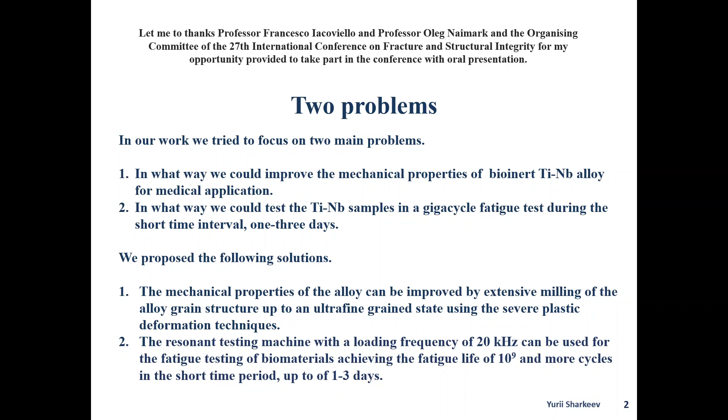The mechanical properties of the alloy can be improved by extensive milling of the alloy grain structure up to an ultrafine grain state using the severe plastic deformation techniques. The resonant testing machine with loading frequency of 20 kHz can be used for the fatigue testing of biomaterials, achieving the fatigue life of 10 power 9 and more cycles in a short time period, up to 1 to 3 days.

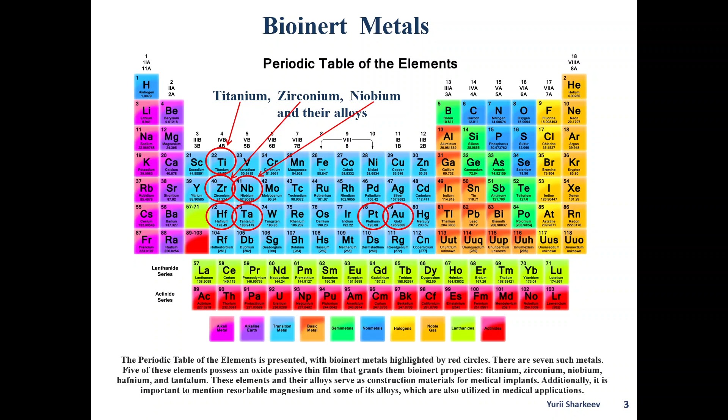The periodic table of elements is presented here, with bioinert metals highlighted by red circles. There are 7 such metals. 5 of these elements possess an oxide passive thin film that grant them bioinert properties: titanium, zirconium, niobium, hafnium, and tantalum. These elements and their alloys serve as construction materials for medical implants. Additionally, it is important to mention resorbable magnesium and some of its alloys, which are also utilized in medical applications.

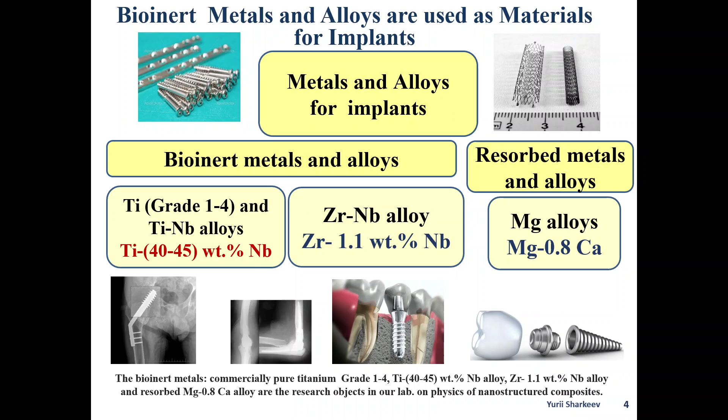The bioinert metals, commercially pure titanium, titanium niobium alloy, and zirconium niobium alloy, as well as resorbable magnesium calcium alloy, are the research objects in our laboratory of physics of nanostructured biocomposites.

The titanium niobium alloy is an exceptional bioinert material for medical implants due to its biocompatibility, high corrosion resistance, and low elastic modulus, which is comparable to that of bone tissue. However, this alloy possesses one drawback: insufficient mechanical strength. The titanium niobium alloy exhibits an elastic modulus within the range of 50 to 60 gigapascals. Alloys of this composition are utilized in medical application as materials for medical implants.

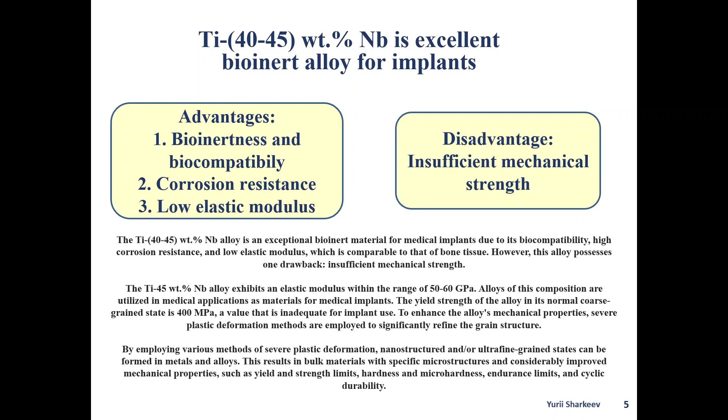The yield strength of the alloy in its normal coarse grained state is 400 megapascal, a value that is inadequate for implant use. To enhance the alloy's mechanical properties, severe plastic deformation methods are employed to significantly refine the grain structure. By employing the methods of severe plastic deformation, nanostructured and/or ultrafine grain state can be formed in metals and alloys. This results in bulk materials with specific microstructures and considerably improved mechanical properties such as yield and strength limits, hardness and microhardness, endurance limits, and cyclic durability.

We employ a combined method of severe plastic deformation consisting of ABC pressing followed by multi-pass rolling to create an ultrafine grain state in titanium niobium alloy billets. ABC pressing involves one or three pressing steps at a constant temperature. As the process transitions from one pressing step to another, the sample temperature is gradually decreased by 50 centigrades within the 500 to 400 centigrades range.

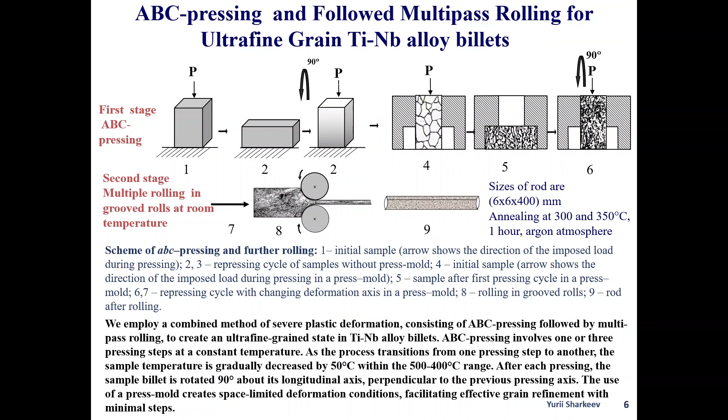After each pressing, the sample billet is rotated 90 degrees about its longitudinal axis, perpendicular to the previous pressing axis. The use of a press mold creates space-limited deformation conditions, facilitating effective grain refinement within minimal steps.

The microstructure of the sample is presented in an ultrafine grain state in comparison to the coarse grain state of the titanium niobium alloy. The sample microstructure was analyzed using transmission electron microscopy with structural element size measured from the TEM dark field images. Rolling during the second stage results in a homogeneous ultrafine grain state throughout the volume with an average structural element size of

0.28 micrometers. Alloy billets with this microstructure exhibit low ductility under tension, not exceeding 2 to 3%. Annealing at a temperature of 350 centigrades increased plasticity up to 5.5% while maintaining the ultrafine grain state.

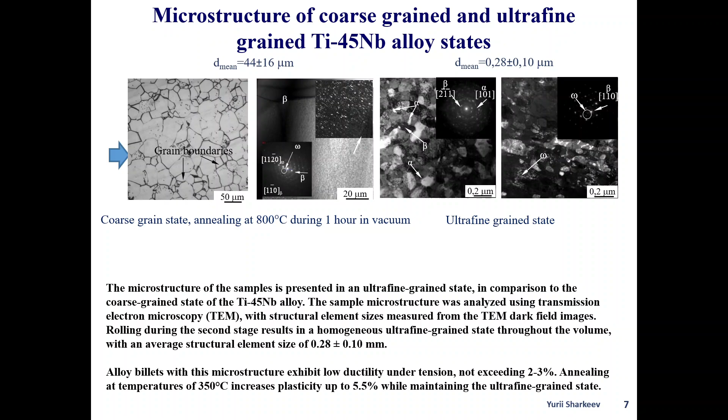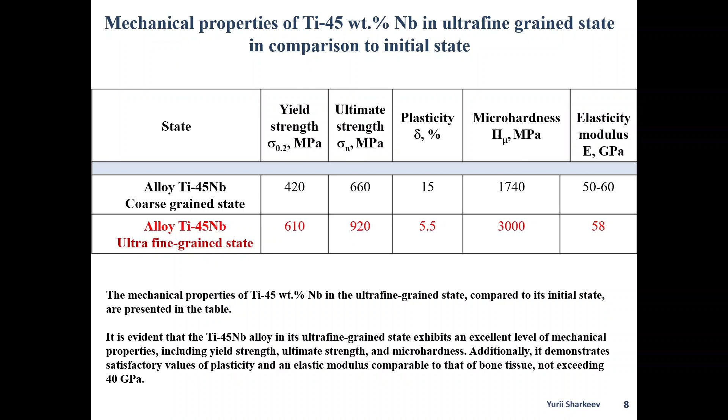The mechanical properties of titanium niobium in the ultrafine grain state compared to its initial state are presented in the table. It is evident that titanium niobium alloy in its ultrafine grain state exhibits an excellent level of mechanical properties including yield strength, ultimate strength, and microhardness. Additionally, it demonstrates satisfactory values of plasticity and elastic modulus comparable to that of bone tissue, not exceeding 40 gigapascals.

The service life of an implant is expected to be at least 15 years or more, considering an individual takes 120 steps per minute.

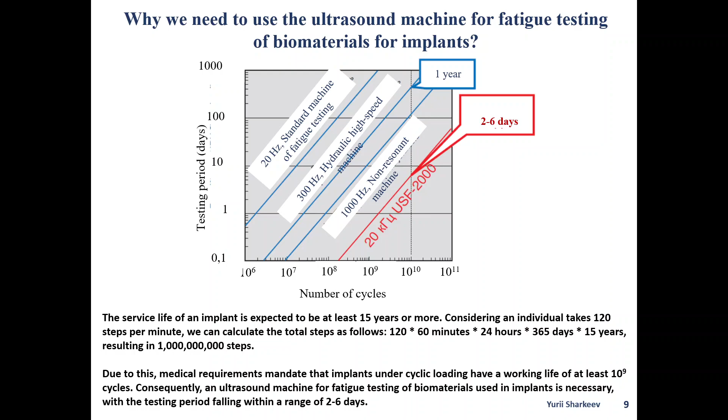Consequently, an ultrasound machine for fatigue testing of biomaterials used in implants is necessary, with the testing period falling within a range of 2 to 6 days. A resonant type testing machine, the Shimadzu USF 2000, was utilized in our studies by the scientific group led by Professor Oleg Naimark in Perm. The loading frequency was set to 20 kHz.

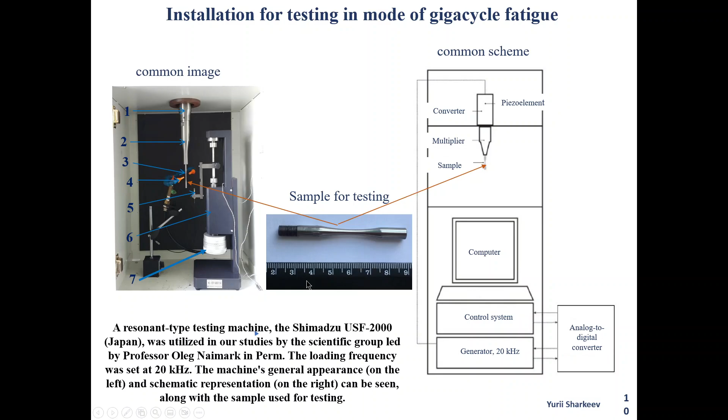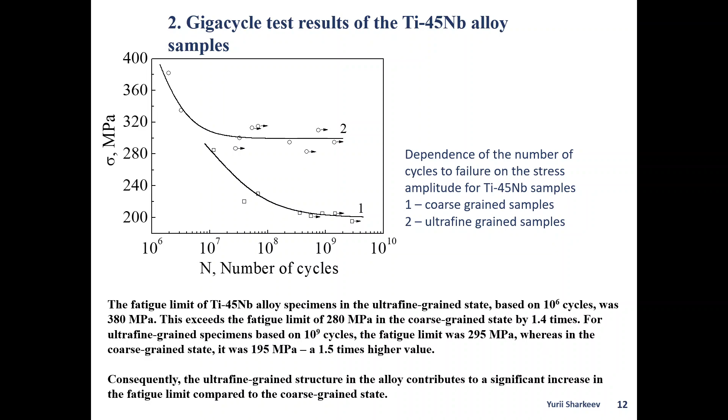The fatigue limit of the titanium niobium alloy specimen in the ultrafine grain state, based on 10 to power 6 cycles, was 380 megapascals. This exceeds the fatigue limit of 280 megapascals in the coarse grain state by 1.4 times. For ultrafine grain specimens based on 10 to power 9 cycles, the fatigue limit was 295 megapascals, whereas in the coarse grain state it was 195 megapascals, a 1.5 times higher value. Consequently, the ultrafine grain structure in the alloy contributes to a significant increase in the fatigue limit compared to the coarse grain state.

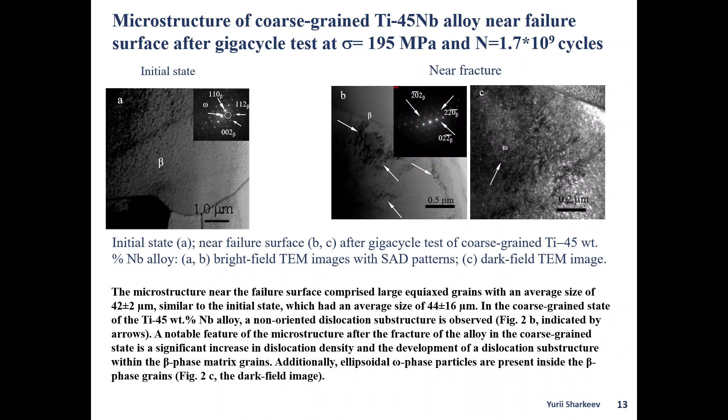The microstructure near the failure surface comprised large equiaxed grains with an average size of 42 micrometers, similar to the initial state, which had an average size of 44 micrometers. In the coarse grain state of the titanium niobium alloy, a non-oriented dislocation substructure is observed. A notable feature of the microstructure after the fracture of the alloy in the coarse grain state is a significant increase in dislocation density and the development of a dislocation structure within the beta phase matrix grains. Additionally, ellipsoidal phase particles are present inside the beta phase grains.

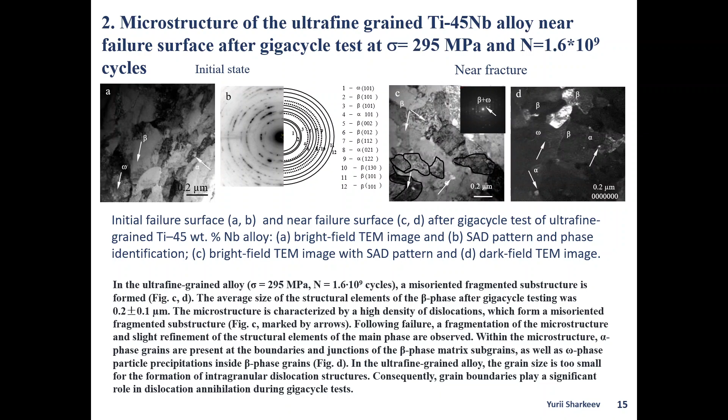The average size of the structural elements of the beta phase after gigacycle testing was 0.2 micrometers. The microstructure is characterized by a high density of dislocations, which form a misoriented fragmented structure. Following failure, a fragmentation of the microstructure and slight refinement of the structural elements of the main phase are observed. Within the microstructure, alpha phase grains are present at the boundaries and junctures of the beta phase matrix subgrains, as well as omega phase particle precipitation in beta phase grains. In the ultrafine grained alloy, the grain size is too small for the formation of intragranular dislocation structures. Consequently, grain boundaries play a significant role in dislocation annihilation during gigacycle tests.

Here are the main results of the work. The application of severe plastic deformation comprising multi-step pressing and multi-pass rolling in grooved rolls enabled the formation of an ultrafine grain state in the titanium niobium alloy. This resulted in a significant increase in mechanical properties while maintaining the elastic modulus and moderately reducing ultimate plasticity. Furthermore, the titanium niobium alloy in the ultrafine grain state exhibited superior fatigue properties under gigacycle loading. The ultrafine grain structure is stable during gigacycle loading and ensures a service life up to 10 to power 9 cycles or more with enhanced fatigue strength.

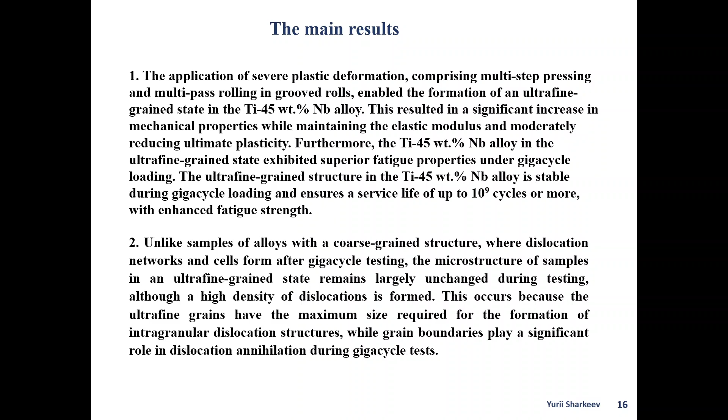Second, unlike samples of alloys with a coarse-grained structure, where dislocation networks and cells form after the gigacycle test, the microstructure of samples in an ultrafine grain state remains largely unchanged during testing, although a high density of dislocations is formed. This occurs because the ultrafine grains are below the size required for the formation of intragranular dislocation structures, while grain boundaries play a significant role in dislocation annihilation during gigacycle tests. That is all for now, and we are working towards more improvement in the future.